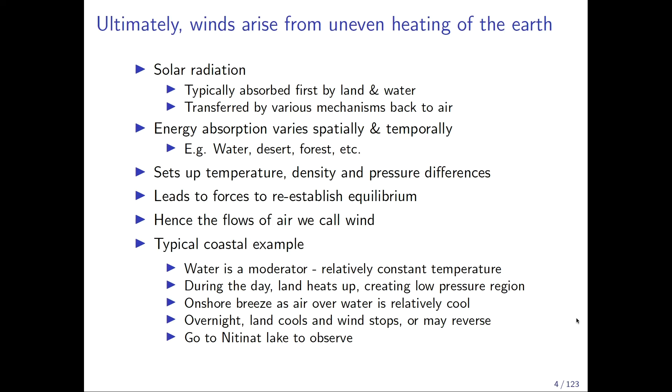So ultimately, the wind is actually a solar resource. So there's really only solar we have, which is stored as fossil fuels, or we use it directly in PV panels, or it makes winds, or you've got nuclear, basically. So what happens is you have the sun, it heats the land and the air, that creates differential pressures essentially on large scales, like we're seeing today with the new weather pattern coming in, and it's that large scale heating and pressure differences that then actually force the winds that we experience.

The absorption of that solar energy varies hugely depending whether you're offshore or onshore. There's things like if you have snow, it bounces back a lot of the light, versus a dark surface would absorb more. So there's lots of smaller scale regional impacts of that on where the wind gets developed.

So the typical one is that coastal example, and you get different directions of winds over the day. So you might have the water, which, that's why it's nice to live here, right? It stays relatively at the same temperature. During the day, the land heats up. Essentially, air is rising, you get an onshore breeze, and then you get a reverse overnight as you get the cooling.

So when we talk about individual wind turbines, ultimately what governs their operation, which is turning a rotor to make electricity, are the local winds to that rotor. So the topography is really important for that. If you're at the top of a hill, if you're in a valley, those kind of things make a big impact. And when you're laying out wind turbines, you think about that a lot.

The surface conditions, which is essentially what we sometimes call the surface roughness. So if you're out on the ocean, it's a relatively smooth, flat surface, as opposed to a forested area where you have built up trees. And that has implications for essentially how the wind speed varies with height, and we'll see a bit of that later. And then obviously urban areas, not great typically, because we have larger buildings which are really disrupting the wind resource.

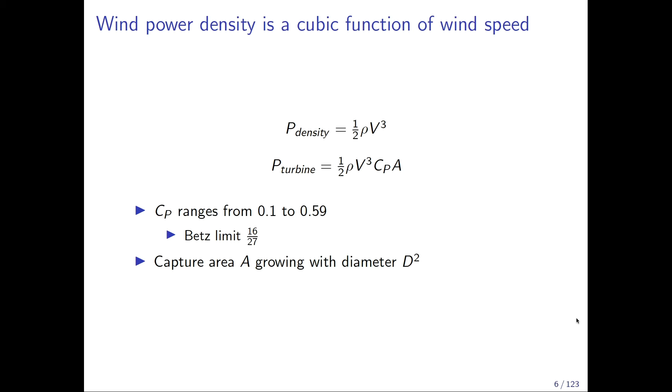So I've got one or two equations in here just because these are the super fundamental ones. So the big thing to take away from this is if you're talking about what is the energy density of the wind, so we talk about the wind speed. If you're a sailor, you'll know that in knots. We usually talk about it in meters per second when we're doing calculations, maybe miles per hour.

But fundamentally, the thing to know is that the wind speed, which we typically give the symbol V, the power available in the wind goes with the cube of the wind speed. So if you're thinking I've got 10 knots of wind, it's 10 times 10 times 10, it's 1,000 times the power in that.

Basically what that means is that if you have low wind speeds, there's really not that much power in them. You have to get up into a bit higher wind speeds because of that real big ramp up in power with the wind speed.

This is the other one. So this is basically an equation that could describe any wind energy device and its power output. And again, I'm just showing you this so you kind of get an order of magnitude sense of things. So this rho symbol, this Greek symbol here, is the air density.

And that's something around 1.2, but it will vary plus or minus, say 10%, depending on the temperature, more or less, a bit of humidity. So in the north, where the air is quite cold, it's actually quite dense, or in the winter, versus in the summer, air is less dense. So that's important. We've got that cubic relationship. And then these are the two things when we go and design the turbine that we could really control.

So this first thing, this CP, is the coefficient of power. So that's kind of like the efficiency, I guess. And it turns out that there's a fundamental kind of upper limit on that of about 0.6, this 16/27, the so-called Betz limit you might have heard of. That's the best you could ever do with an idealized machine.

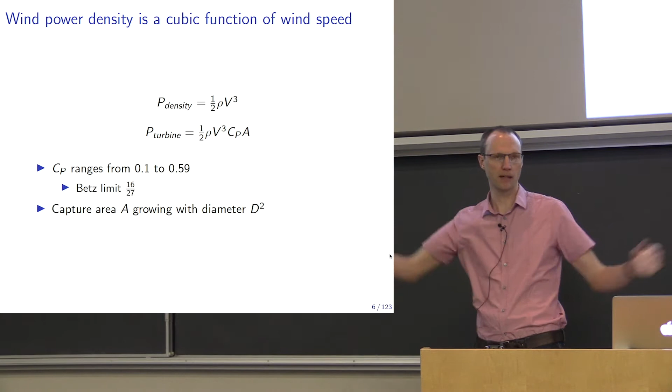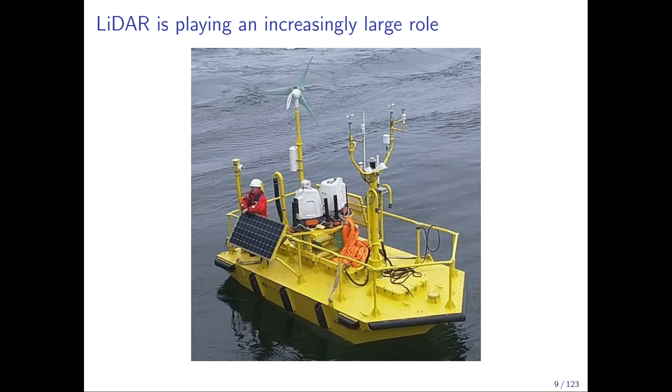This is a buoy; we're in the process of acquiring one of these from a company out in Sidney called AXYS Technologies. It's called the Wind Sentinel. So it's called a buoy, but it's like the size of a boat. And this is really on the leading edge of wind measurement technology. So these two things in here, each one of those is what we call a LiDAR.

And essentially what that does is it has a head in there that shines up a cone of light into the sky, and you can go up hundreds of meters. And the little aerosols in the air, basically the dirt or the water droplets in the air, reflect off of that light. It gets scattered back, and then there's a receptor in there that can back out from that what the wind speeds were at different heights.

So the reason we're doing this is, one, you can get more levels of information. Usually on the met mast, you might have 3 or 4 levels you could put anemometers at. This would allow you to sample 10 or 20 different layers without having to build a mast. So particularly as we think about offshore applications, it's a lot cheaper to go and anchor one of these things. It's got redundant LiDAR heads on it, and do your measurements that way as opposed to trying to put up a large tower.

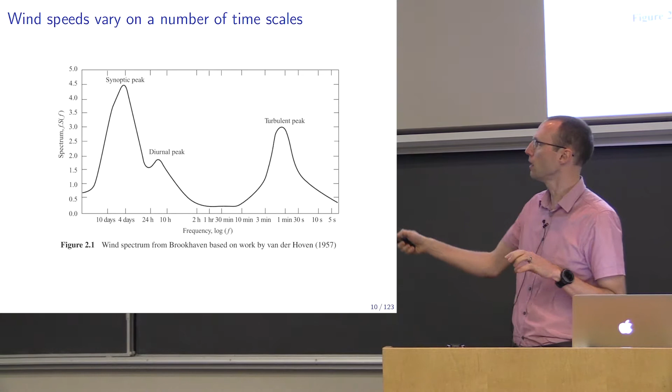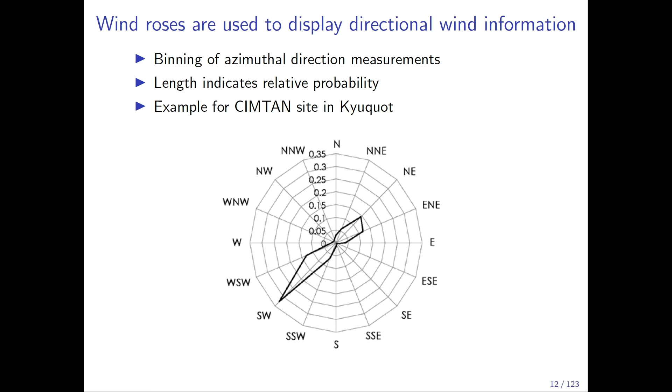So matching the shape of this curve to where we operate the turbine is really important, and this gives a snapshot to a wind farm developer of what their wind resource looks like. We also have this thing called a wind rose, and that's essentially the points of a compass, and you do your measurements for a year, you look at how frequently it is blowing in different wind directions, and you can plot it on here. So this was an example.

We were working on a site up on the northwest side of the island. So a lot of the wind comes from the northeast, and a lot of it comes from the southwest. We were in a valley, so the wind would tend to align with that valley and blow along those two predominant directions. And again, that's useful if you're doing layout of a wind farm. You can preferentially place your turbines so that they're not obstructing each other along those typical wind directions.

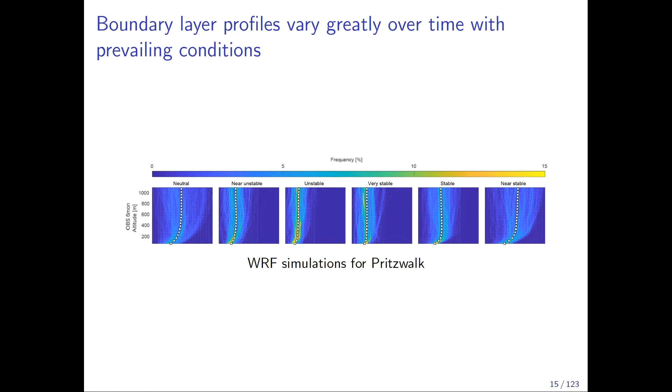So this was an example of some analysis and simulations we were doing for a site over in Germany. It's on land, it's relatively flat, but it gets winter storms and various things. And basically what I'm trying to illustrate here, so this is a plot, on this axis is the wind speed. So these are a bunch of different potential boundary layers.

So basically at the ground, the wind speed is 0, and then up higher there's a larger scale wind blowing, and in between you have to match from that 0 velocity at the ground up to what the edge of the boundary layer is moving at. So the colors correspond to different frequencies of these different shapes of the boundary layer, and each of the plots corresponds to a different atmospheric condition.

And we characterize that atmospheric condition basically by how much heating is going on. So if the sun's out and shining, it's heating the ground a lot. There's a lot of convective forcing. The air is trying to move up from the ground, and everything gets mixed together, as opposed to more stable conditions. And the net result of that is if it's really unstable, you can see this boundary layer is relatively uniform. It doesn't matter where you operate in there, the wind speed's more or less the same. Whereas if you get towards more stable or neutral, there's more of a curve.

Basically what all of that means is you want to try and move up that curve because there are higher wind speeds as you go higher up in those conditions. We were doing this in the context of airborne wind energy. As we'll see, we're flying up more in here. Conventional wind is somewhere down in these lower parts there.

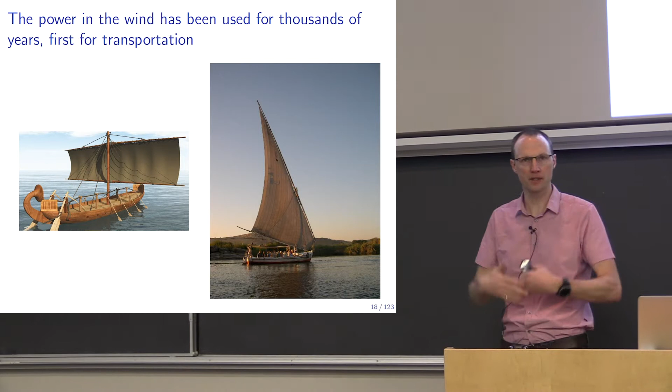So if you go way back, how did we actually use wind? We started off using it for sailing ships, right? It was a motive force, direct mechanical work to move a hull through the water. Back in about the 1st century AD, it was actually the Persians who came up with this windmill idea to grind grain, or pump water typically.

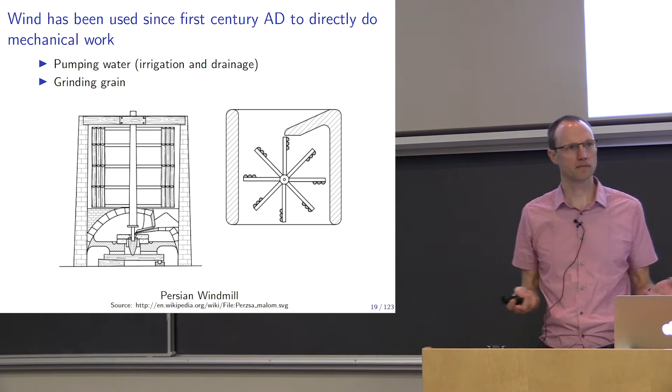So with this one, the wind would come from the top, it would be obstructed by this piece here, and then the wind would hit this rotor and spin it around, and you could hook that up to a set of grinding stones at the bottom and grind your wheat without having to haul it around by hand. So wind's actually been used for a couple thousand years in a stationary capacity like this.

Before we jump into more of that, just a little bit of terminology to be aware of. So most of the turbines you'll see are what we call HAWTs, or horizontal axis wind turbines. And all that means is that you have a rotor that spins on a rotation axis that's horizontal.

Okay, so moving on from our Persian windmills up into the 17th century, something like that, we have this Danish windmill and the Greek windmills. And again, for water pumping, grain grinding, these kind of applications. Some of these are really big. If you ever get a chance to get over there and tour, it's kind of amazing what they were able to build essentially out of wood.

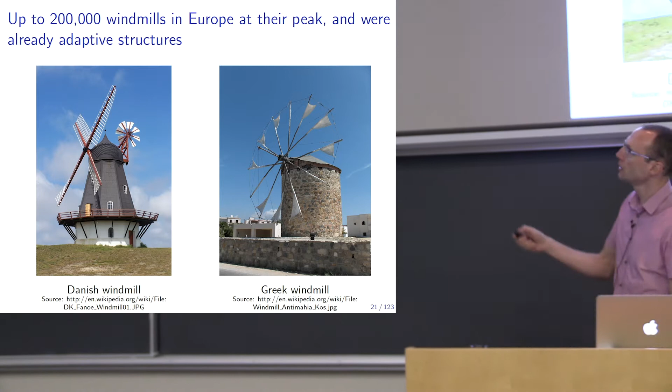And they're what we actually call an adaptive structure. So there's a lot of modern aerospace concepts where you'll design the structure to flex in certain ways. These original concepts kind of naturally did that due to those wood spars. They have sails essentially that you can unfurl and adjust the amount of power going into them. So it's actually fairly advanced stuff. And also the amazing thing is there were a couple of 100,000 windmills in Europe a couple hundred years ago, already deployed, already working.

If you've seen the US Western movies, those kind of things, this is the iconic water pumping windmill that has a lot of blades. As we'll see, you don't necessarily need that in a modern wind turbine, but the reason that these were done is that the more blades you add, the more torquey the wind rotor becomes. So with these, it has a direct shaft down pumping water out of the ground. So that's why you wanted a lot of blades on there to actually be able to drive the suction.

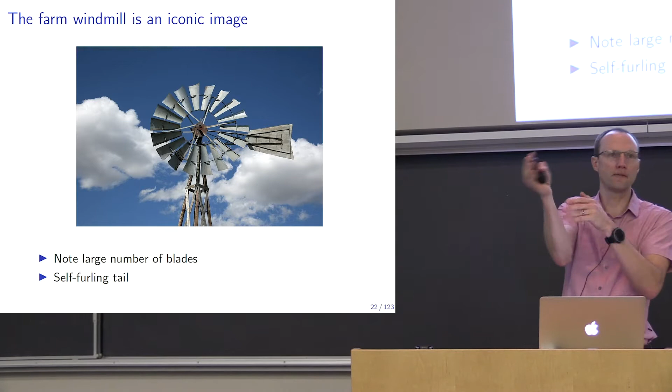It's also got a tail on it that will furl, and essentially when the wind gets too strong, that tail will flex or move and have the whole rotor turn out of the wind, and that's its way of doing power control.

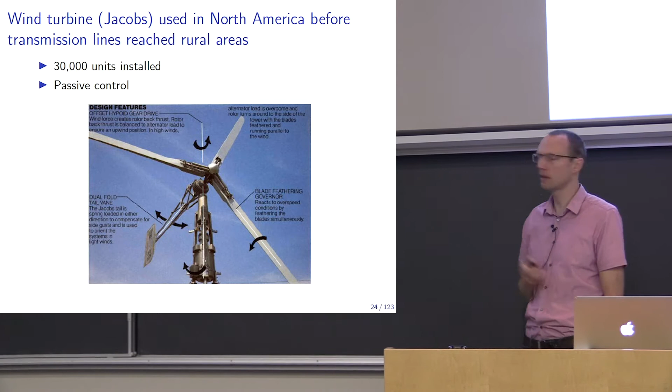There were these Jacobs turbines, back in the 30s and 40s across the plains where there wasn't electrification, there wasn't the distribution network yet. So these were popular on farms and things like that to provide power there.

And then really the modern era of wind energy started in about the 1970s, and it grew in large part out of the Danish experience. Denmark has essentially no natural resources themselves, so they were really hammered by oil prices and things like that, and invested a lot into the development of wind energy.

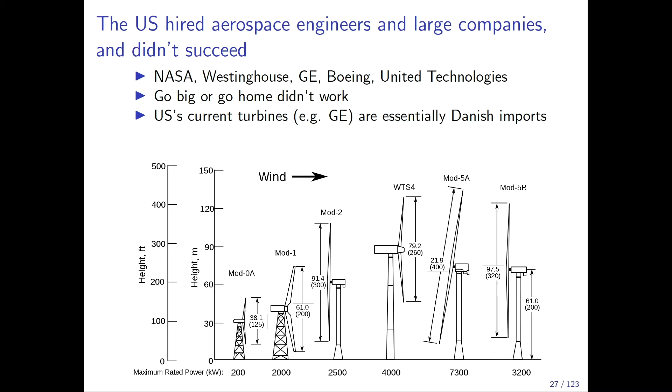They hired Boeing, NASA, etc., and took kind of an aerospace approach to things, and started with quite large machines. So these so-called mod series of machines were actually already very, very large-scale machines. They were using kind of aerospace concepts sometimes in terms of aluminum components and other things. And this is an example of one of their machines.

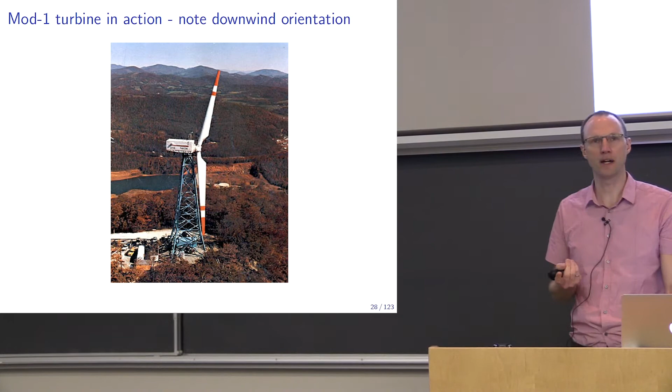This is the rotor, so the wind would be coming from the left. It's what we call a downwind rotor. They were using this truss tower because structurally that's really efficient, although you never see those anymore because they're ugly and people hate them, and birds nest on them. So for a bunch of reasons you wouldn't want to do it. But unfortunately, the US effort was essentially an unmitigated failure and kind of died off.

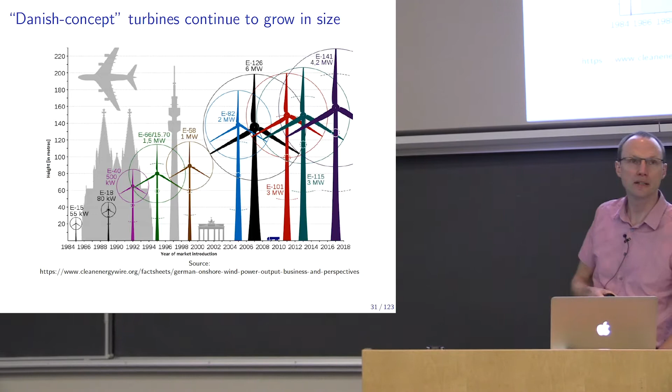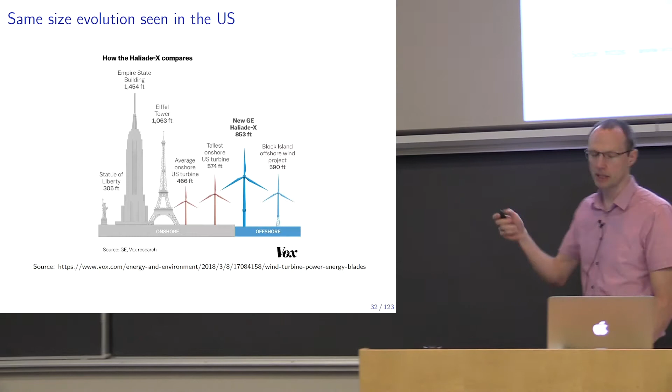But the most recent one that they're just testing now, just started last fall, is this Haliade-X machine. So you can see 860 feet to the top of that one. Quite huge. It's different because when you go offshore, as we'll see, you can go a lot bigger. So that's kind of what's driving that development.

If you go and order up a wind turbine, so you dial up Vestas, go to their website, you get their brochure because you want to buy a wind turbine. Usually what you'll find is a catalog of a nominally rated machine, but it'll come in a bunch of different versions, kind of like different versions of a car or an aircraft when you order it.

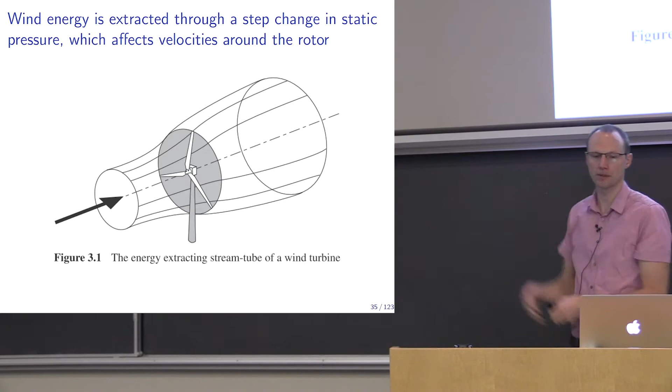This is another illustration. So we have our rotor here, and you notice that these simplified models don't say anything about the shape of the blades. This is where we get that fundamental limit to the power capture from: we have what we call an actuator disk. So that's just a region in space that's taking pressure out of the flow.

And then again, we start up here, we have our wind blowing in, it approaches the rotor, the pressure rises, it hits the rotor, that's causing that pressure drop, and then somewhere back here in the wake, the wind is mixing back in, we go back to atmospheric pressure, and we have a reduced wake velocity. And then far downstream, everything mixes totally together, and you have the free stream wind speed again. Okay. So that's fundamentally what's going on.

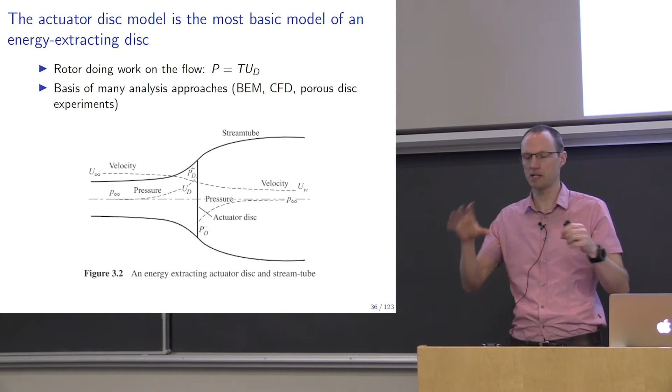That's the basis of some of our analysis codes. And it turns out you can actually do experiments like this. So you can go into the wind tunnel, you can take just some wire mesh, which causes a pressure drop, and you can use that to simulate a wind turbine, especially if you're trying to simulate a big array of wind turbines. That's one way of doing it.

And essentially that's what we do to analyze the rotors. We break it down into a bunch of sections and we look at what is the flow as the rotor is spinning around, what's the flow coming into that airfoil, what forces get generated, and that tells us what the power output is, is the blade going to break, etc.

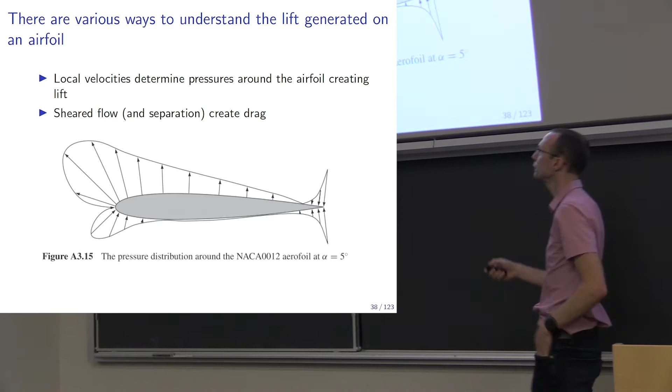So that's our little picture of the airfoil. And again, fundamentally what's happening here is we've got wind coming in like this, hitting the airfoil at what we call an angle of attack, so it's not just straight onto it. And then because of how the wind flows around the airfoil, we generate different pressures around the airfoil. So that's what these lines are supposed to indicate, our pressures on it.

So this is what we call the suction surface on the top; there's actually negative pressure there, so it's sucking it up, and then there's some positive pressure here. We add up the pressure all the way around the surface, and that's what gives us a net lift and a net drag coming out of it.

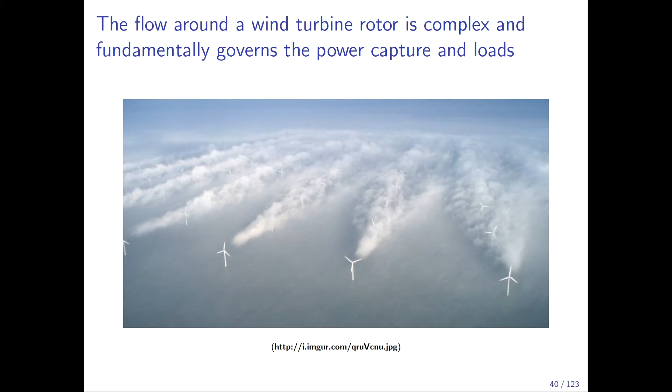So the lift is the good thing, that's the thing driving the rotor around. The drag is kind of the bad thing that's slowing our rotor. So we're always trying to maximize the lift to drag ratio of the airfoils, and there's lots of work that goes into designing the shape of those airfoils to make them most efficient. So aero is complicated.

So this is a picture of the Horns Rev offshore wind farm, one of the early ones, the earliest one I believe, that was put in. And this is kind of a nice flow visualization: you have some relatively moist, humid air, so with those pressure changes you actually precipitate out some of the moisture and you can see it as clouds. So this is just showing essentially the wakes and how they're all mixing together.

This is an example of where the wind is coming along the line of where you install your turbines. If you look really closely, there's turbines that are installed in like a grid. So this is kind of a bad situation in that the upstream turbines get nice clean air, but the ones further into the array are getting all the turbulent, lower speed air. So you try and avoid that as the standard wind direction. You wouldn't want to line it up in that direction.

There's also some research and some controls where you might not operate these machines at their peak efficiency. You kind of back them off a bit, but it means that the wake is less, and hence your machines further into the farm can actually generate more power. So as a whole, and you might have a couple of hundred turbines in your array, it's going to give you more power output.

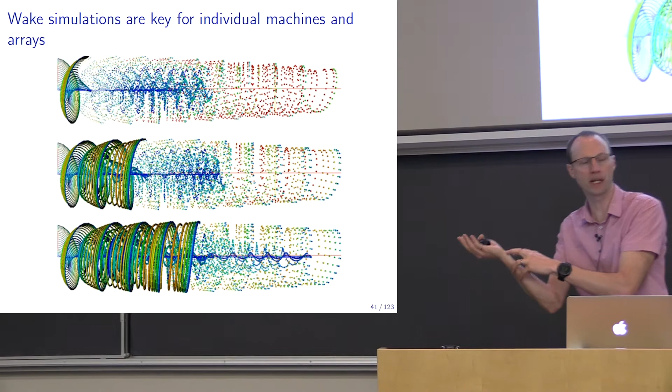This is some simulations that we've done in my lab. Essentially what this is showing again is the wake of the turbine. Idealized, it kind of looks like a helix. So these are some filaments and particles with which we can simulate what that wake structure is. And the reason we spend time on that is that the shape of that wake structure influences what the velocities are right at the blade. And it's those velocities that govern how much power we can produce. So that's why we look at that.

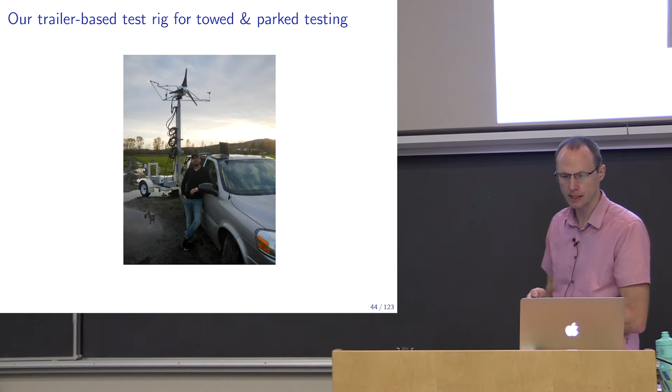That's a real challenge. So one thing we were doing in my lab was using, again, a small rotor here, about a 1.5 meter diameter rotor. What we did was we mounted it on a trailer on a tower, and we can drive this down the road and get that relatively uniform wind speed, but the idea was that we could also go and erect a mast and put it in a turbulent environment and actually just measure the real turbulence. So on the back here, it's a little bit hard to see, we have one of those sonic anemometers, so we can measure the high frequency variations of the wind speed and give us some experimental data to compare our codes against.

So how do we make turbines better? Aerodynamics is key. It's the same as aircraft. If you can get a little bit of aerodynamic performance improvement over the 20-year life of the turbine, you're going to get a lot more money out of it. It turns out near the root, so in the base part of the blade, just how the aerodynamics works out is the airfoils will try and stall. Basically that means the air can't navigate around it. It tends to break off the backside of the airfoil, and that causes a lot of drag.

So a lot of the times you'll see various different shapes. They can be little foils stuck up on the surface, but essentially what that's trying to do is energize the flow over the airfoil and have it stay attached, which gives a little bit more drag, but overall it's better to avoid stall. You can do things at the trailing edge, so these serrated trailing edges, like a sawtooth pattern you can add to the back of the blade. That can help with noise sometimes, how the air leaves the trailing edge of the airfoil.

There's a Canadian company that took some inspiration from humpback whales that have these tubercles on the front of them. So you can make the front of the airfoil with this wavy pattern in it. There's some evidence that can help, again, avoid some separation, maybe give you some benefits as well. So people try lots of different things. People put plasma actuators on there, all this kind of stuff. Think of an aircraft wing. It's got lots of control surfaces on there, ailerons and things.

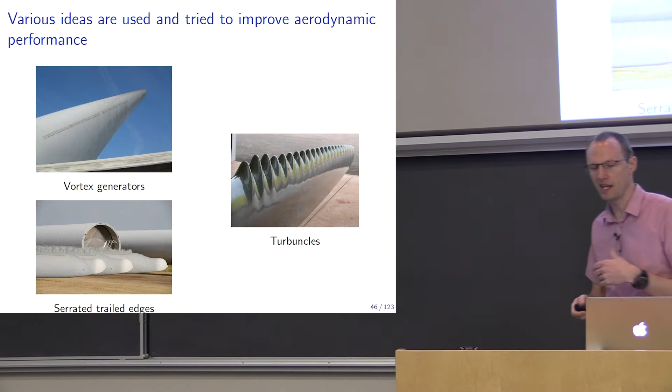Wind turbine engineering is a lot different than aerospace in that you're a lot more cost conscious, and your maintenance intervals are more like 6 months to a year. An aircraft gets serviced as soon as you land, every 5 to 10 hours, right? Whereas a wind turbine has to work reliably by itself for long periods of time. So complexity is typically bad. People have tried putting ailerons and other things on blades, but practically speaking, it's not going to have the reliability that you need. So it's really challenging.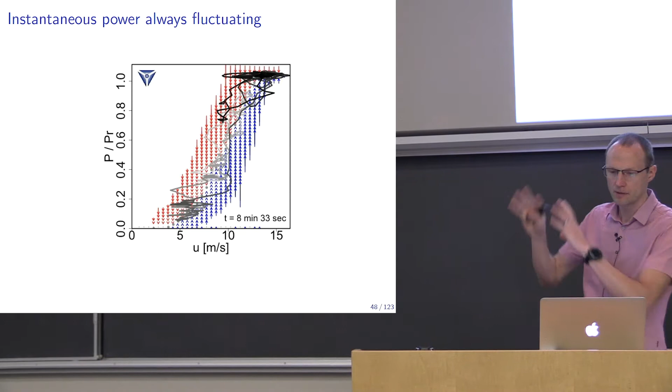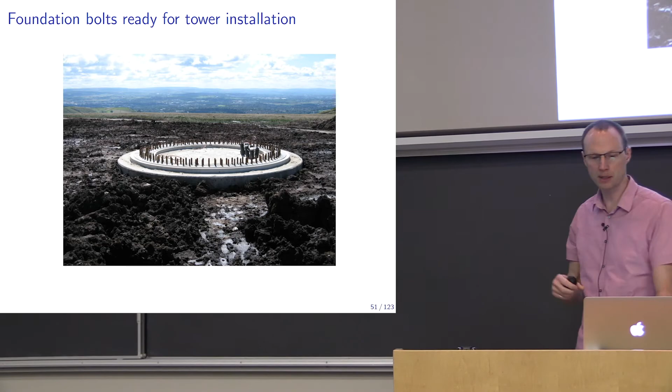So we have to actually build a turbine. Just to give you a little overview of what goes into that, we've got the foundation, which is a whole bunch of rebar, steel basically, that then gets covered in concrete. And you end up with this thing on the surface. There's a bunch of bolts sticking up, and that's what we then bolt the tower onto. As I said, pretty much every tower now is a tubular steel tower. Sometimes some sections are made out of concrete, but it still looks the same from the outside.

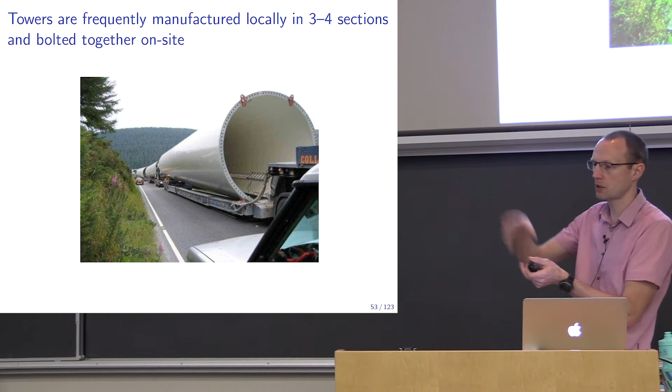Historically, if you're a structural engineer, these lattice towers are beautiful because they're really efficient in their use of material, but they're ugly, so you're never going to build one of those. The tubular towers are very, very big; you try and make them as local as you can, but they could be 8 meters in diameter. Lots of bolts you go in and torque up. Usually they're made in 3, 4, 5 sections, and then a large crane comes and picks them and installs them.

Once you get to the top of the tower, you can literally climb up inside these things and walk around. You have the hub out here. That's usually a big steel casting. And then you have bearings that allow the blades to pitch and some actuators so you can turn the blades around. You have a bunch of big bearings that support that. In here, on a conventional turbine, there'll be a gearbox, just like in your car, usually 2 or 3 stages of gearing. And then that goes into a generator at the back.

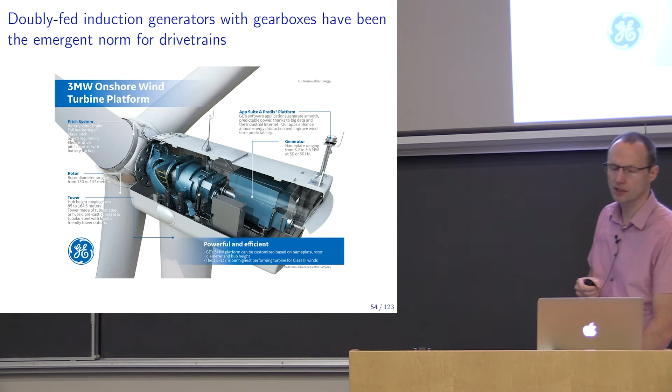That generator takes the mechanical shaft work from the wind spinning the shaft and turns it into electricity. The reason we have a gearbox is because these large rotors might spin at, say, 10 or 15 RPM. Generators like to turn at thousands of RPM, so we put a gearbox in the middle to match the speeds. You'll always see a little anemometer stuck on the top, but that's not actually used for second by second control, because the rotor is really influencing the wind speed by the nacelle. Okay.

Because of the way they do it, these tend to be very, very heavy at the top, but they're kind of rugged in the sense there's no gearbox to break. In the early days, there were lots of problems with gearboxes breaking, and there still are, so we try and avoid it. So this company's been doing that for decades. More recently, other companies, as machines have gotten larger, and particularly going offshore, are doing the same thing.

So Siemens, which bought out Bonus, is now merged with a Spanish company called Gamesa, so they're one company. They also have a direct drive machine you can buy. It's got a hub and a generator, but you notice this is more compact. The reason you can do that is using permanent magnets inside, as opposed to making the magnetic fields with electricity. So it's been able to shrink things down and make it more compact and a bit lighter. It costs a bit more, but on balance, it kind of works out.

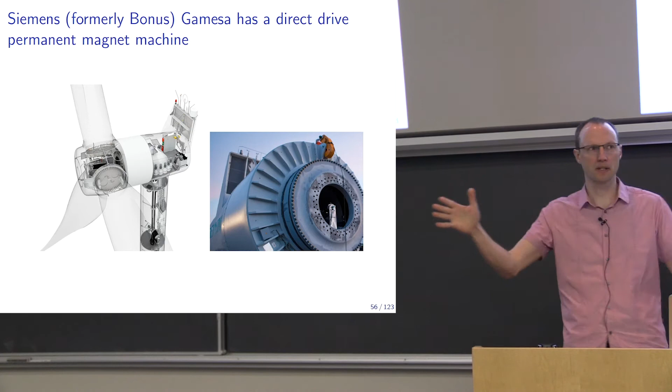You'll also notice down here, these cylinder things, that's a bunch of what we call yaw drives. The turbines also have to turn and face the wind. So there's basically a big gear and bearing in here that allows the turbine to turn and face the wind.

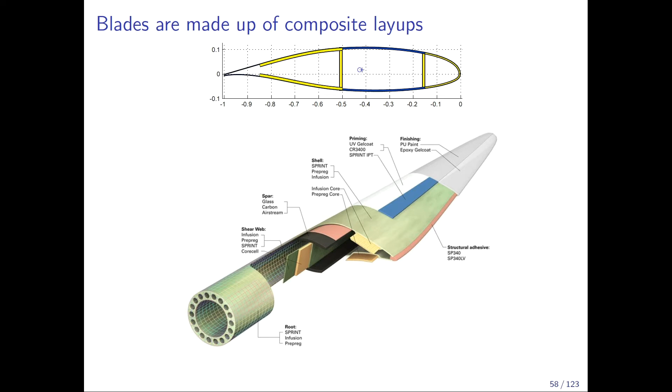For the structure inside, at the root you bond in some metal threaded inserts, so you can actually bolt it onto the hub, and then the rest of it is basically layers. You'll have a gel coat or a paint coat on the outside, and then structural reinforcement. So there's carbon fiber and glass fibers running the length of the blade to take the big bending loads. You'll also have what we call shear webs, these vertical pieces that help give it some of the stiffness and structure as well. I'll skip that for now.

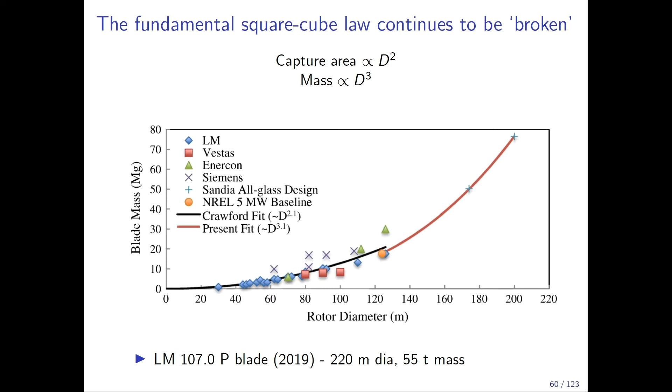This was a plot from way back in my PhD in the mid-2000s. I took a bunch of data and plotted how the weight of the blade varies with the rotor diameter. There's this fundamental square cube law that people talk about. We want to make the rotor bigger to capture more energy. That goes with the square of the diameter, but volume goes with the cube of the diameter. So you're always fighting this battle. I make it bigger, but it's getting heavier faster than I'm making it bigger.

These are some projections from years ago of where things would end up when we get to a 200-meter rotor diameter. We thought it might be like an 80 metric ton blade. The one that was just made at the end of last year is 220-meter diameter and only 55 tons. What that means is the structural concepts have gotten better, which allowed these bigger blades to happen. Otherwise, you wouldn't make it bigger. When I was doing my PhD, a 1 or 2 megawatt turbine was amazing. We're now into 10 plus megawatt turbines.

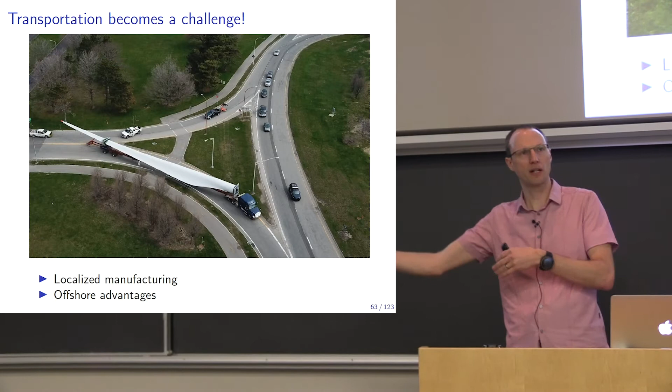The size of the blades becomes problematic for transport. This is probably maybe even a 30 or 40 meter blade, and imagine trying to transport that around. So that's what's limited onshore. You can only make blades of a certain size and still be able to transport them. Whereas offshore, you can put your production plant right next to the pier, stick it on a boat, take it out, and the size is not a problem.

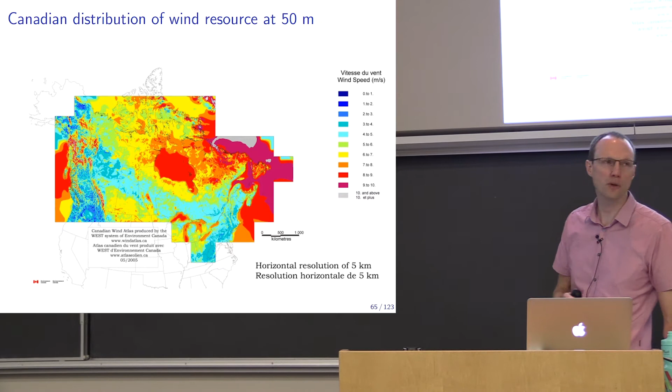So in terms of wind resources, this is a map of Canada, and basically the reds and yellows, that's higher wind speeds. And the point was that it can be localized, so you've got some things in the Rockies and foothills where it's not so great. You've got down here into the prairies, into Alberta, where you get some local wind speeds. But the big thing is you'll notice all this red and pink and purple stuff as soon as you go onto either the Great Lakes or out into the ocean. So there's lots and lots of wind resource at sea, and that's going to motivate us to go offshore.

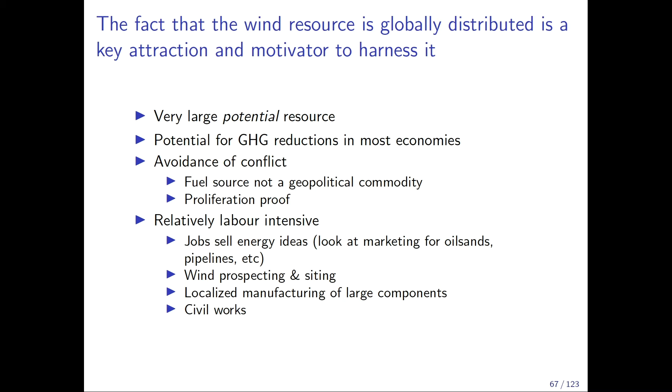So the reason I got into wind originally was because it's a globally distributed wind resource. It's typically a benign kind of thing. In terms of selling wind energy, it can be a good story when we think about jobs, because a lot of it is local just by the scale. So it's all kind of good from that perspective.

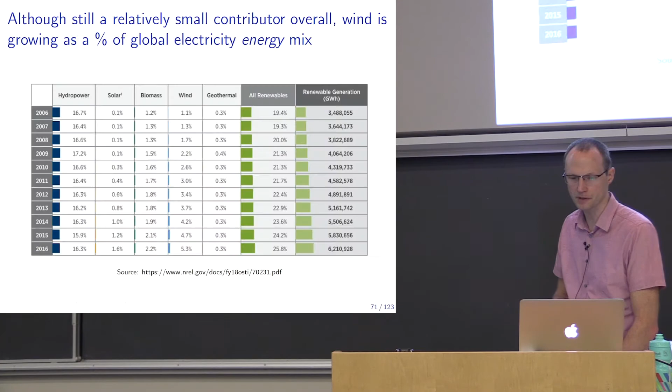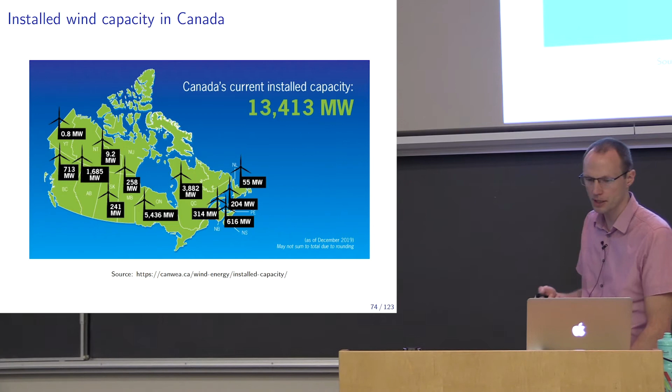Let's skip that. This is what we have in Canada right now. We have about 13 gigawatts of installed capacity. You can see the breakdown. We have a bit here in British Columbia, and then there's really a ton in Ontario and Quebec, and also quite a bit in Alberta. And that's really where it's been developed because of resource. In Quebec and Ontario, some policy things have driven it as well. Skip all of that.

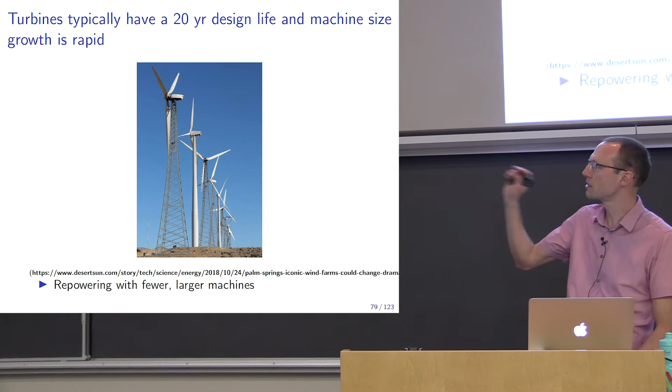Skip that too. I wanted to get to this part, some of the downside. We are now reaching the end of life of some turbines, and you've got to do something with them. These are the old original ones from the 80s down in California. Again, these kind of ugly towers, a mix of different machines. So decommissioning is happening currently, and things that we call repowering, where you're replacing a bunch of smaller turbines with singular larger turbines. The waste issue is also becoming an issue.

Vestas, that company I alluded to, they've committed to being waste neutral over the next while. So it's definitely on the radar, and it's something the industry is looking at. Let's skip that too, actually.

Actually, I don't know, do we want to take a little break and then? Yeah. Let me do that. We'll start with this. Good. So take 5 minutes? Yeah, 5 minutes. Yeah, good.

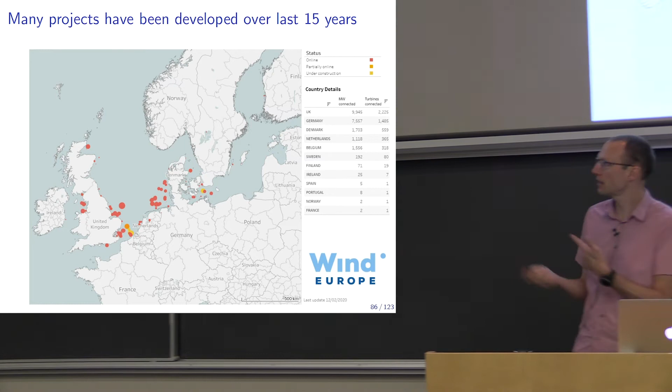When you go offshore, you still have to deal with environmental issues. But typically, especially if you're more offshore, there's less of the local community impact piece of it. Some of these have actually turned into tourist attractions too, where you can pay to take a boat out to see the wind farm. So this is one called the London Array. This is 175 turbines. This was done back in 2013, so 7 years ago is when it came online. It's a total of 630 megawatts. So again, for scale, Site C is 1,100 megawatts rated. So this is about 2/3 of Site C put in out in the Thames estuary.

It's a bit older, so these are 3.6 megawatt turbines, 120 meter diameter rotors. But that's what it looks like as you fly over it. If you ever take off out of Heathrow and you're headed east, do look down. You can literally see it out there. It's kind of cool. Again, as an engineer, I think this stuff looks cool. Some people don't, but that's basically out to sea, so you don't really see these things. It'd be like a little speck on the edge.

There was originally going to be another phase. They were trying to build a whole gigawatt of capacity out there. It got abandoned. I forget the name of the bird, but it was just too hard to fit it in with a migratory bird. So again, in terms of impacts of these things, that is considered, both the installation, if you're putting things in the water, what the local marine life is doing, and particularly migratory birds is an issue.

In the UK, there's actually been some work on stealth blades for wind turbines, basically because there's worry that a low-flying aircraft could use the radar scatter of a wind farm to do a sneak attack, that kind of thing. So siting does go with military considerations as well when you're going offshore. So basically the style of foundation that you do offshore is dependent on what the water depth is and what the local geology is.

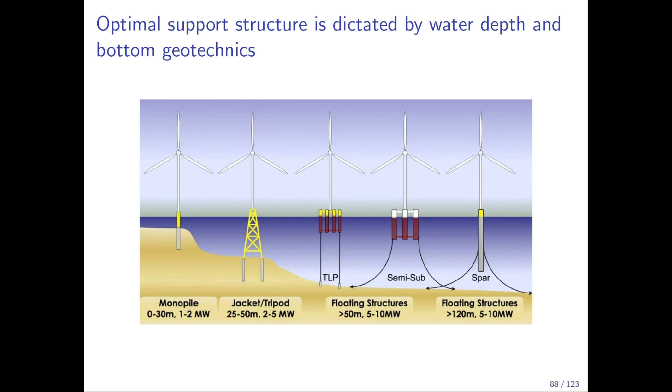So if you're in up to about 30 meters of water, you typically find these monopile things, which are basically just driven into the seabed, and then you bring along your tower and install it. A bit deeper water, these jacket tripod things, basically again you'll drive things into the seabed and then mount a truss structure on top of it and then the turbine on top. We'll come back again to these concepts, but these are what we call floating offshore wind concepts. They're kind of the next generation; there's just been the first array or two of these put in.

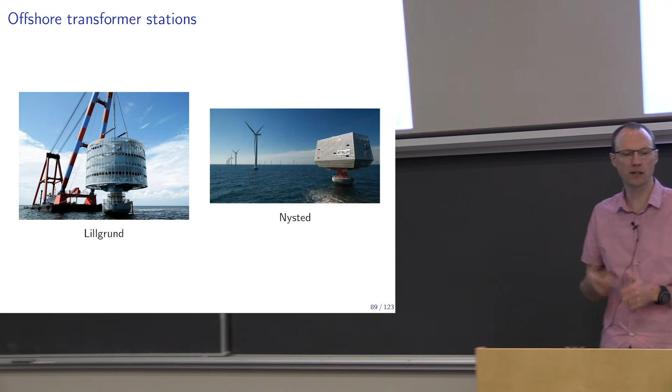The part that you never usually see in a picture of an offshore wind farm, you usually just see this part, are these boxes of some kind, and those are the local substations. So you have feeder lines from all the turbines being brought together. You'll have a transformer in there to take it to a higher voltage, or sometimes DC instead of AC for transmission back to shore. And the layout and sizing and those underwater cables are pretty expensive, so you try and do that as efficiently as possible.

There's been a whole specialist industry spawned by offshore wind. It used to just be you'd have to rent these giant oversized cranes that are usually for lifting ships and things like that. But there's a number of what we call jack-up vessels or jack-up barges now available that you can rent if you're building your wind farm. Essentially, in relatively shallow waters, you can put these legs down into the water and jack the whole thing out of the water. So now if it's windy or wavy, it doesn't matter. You've got cranes on board that do the picking and placement of all the tower pieces and then the nacelle.

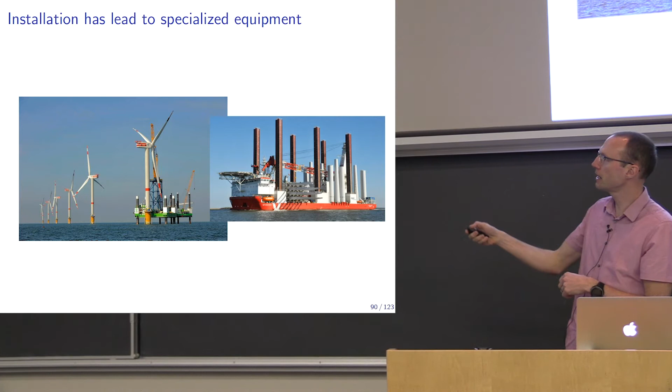You'll see on board here, it'll go out with a number of different turbines on board, 4 or 5 turbines, blades stacked up in there. Sometimes they'll do this bunny ear configuration where they have 2 blades already attached to the nacelle, so they can lift that up in one lift operation and then just have to put a third turbine blade in at sea. And again, lots of process optimization to get that efficient and running well. And the cranes, it's not really a weight limitation, it's more just a height and size thing, so that's why you end up with specialist equipment.

Similarly for servicing, these turbines are visited typically every 3 to 6 months, something like that. So there's some specialized vessels to do the crew transfers, drop them off to do their work for the day. I don't think it's as common anymore, but there are also sometimes small pads on the top where you can helicopter and get winched down onto the nacelle. And you'll typically see these yellow things. That's the part in the wash zone that gets splashed, and then the top part is more similar to a conventional onshore wind turbine.

The first one, Horns Rev 1, there were definitely growing pains through the 2000s. They basically took an onshore machine and put it offshore. We learned that salt water is not good with electricity and things. Surprise. So there's actually positive pressure inside these now. They'll have filtered air that gets sucked in, you pressurize inside, so any leaks essentially are going out, so you keep the humid salty air outside, things like that. And again, ruggedization and reliability is the name of the game here.

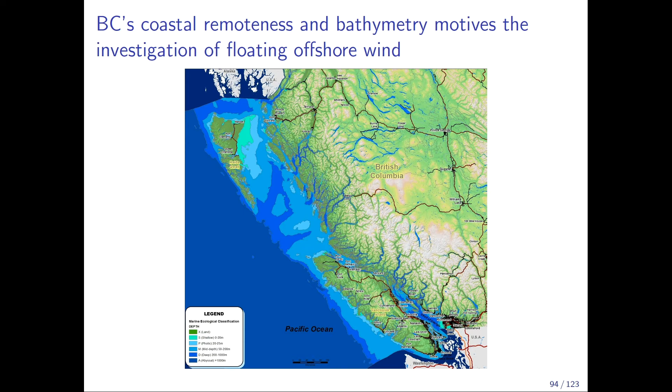So in terms of resources, we saw this, in Canada and in the US there's a lot of offshore resource, in particular in BC. If you look in here, this is Haida Gwaii up here. This is what people talk about as our big resource. NaiKun was a company looking at it, but there's something like a gigawatt or 2 of wind energy in relatively shallow water available up there. And that's important. So this is the bathymetry: darker blue is super deep, lighter blue is better. You can see where that wind resource is, there's also some relatively shallow water, which is why it was interesting. It's unfortunately not next to where most of us live and take electricity, so the transmission line piece of it you'd have to work out.

But this is what's motivated some of this floating offshore work, in particular in North America and some in Asia as well, because we have relatively deep water compared to the North Sea and the European experience. So down off of Oregon, California, and then we also have opportunities out here. Again, there's lots of wind resource out here. If we could make things that worked in deeper water, there is wind resource there for us to capture.

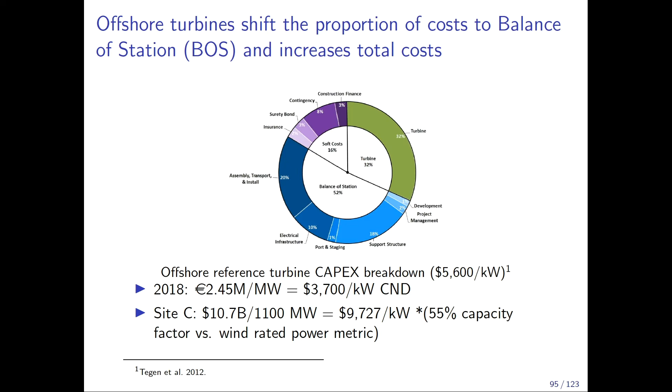It's a little bit into costing stuff, and really the takeaway I just wanted to point out here was that here's a pie chart of all the costs that would go into an offshore turbine. And actually the turbine itself is only about 30% of the cost. For an onshore turbine, that might be more like 40 to 50% of the cost. But as you go offshore, all the other stuff, so the support structure, assembling it, transporting it, installing it, this slice of the pie gets bigger.

In terms of cost breakdowns, it's really hard to get accurate cost numbers because what people actually sell machines for is extremely commercially sensitive. But as rough estimates, in 2018 at least, we had something on the order of $3,700 Canadian per kilowatt installed. So if you're going to make a megawatt machine, it would be like $3.7 million to get it put in. As a comparator, here's Site C. Current numbers, this has probably changed again, but something in the order of 10,000 a kilowatt.

Now, you can't exactly compare them apples for apples because we have this thing called capacity factor, and that's basically how much of the time you run at your full capacity, that kilowatt capacity, versus how much energy you actually make. So Site C is going to have something on the order of a 55% capacity factor. Onshore wind traditionally has had something like 20 to 30, 35% capacity factor. That's shifting offshore. Demonstrated capacity factor has been up to 65%, or sometimes even up to 70. So that's a much better utilization of your kilowatts of generation capacity.

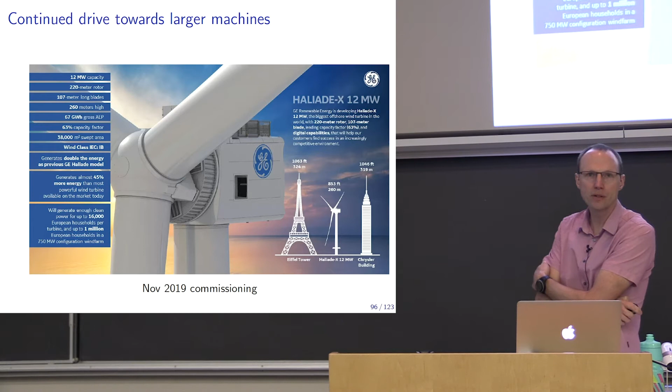This one has just been commissioned in November. You basically go through a certification process. It takes a year or so, and then it'll be commercially stamped, and you can go and buy it as a product. And this is the kind of scale when you're planning a wind farm out over the next 2 to 5 years. That's the kind of scale of machine that you're thinking of installing.

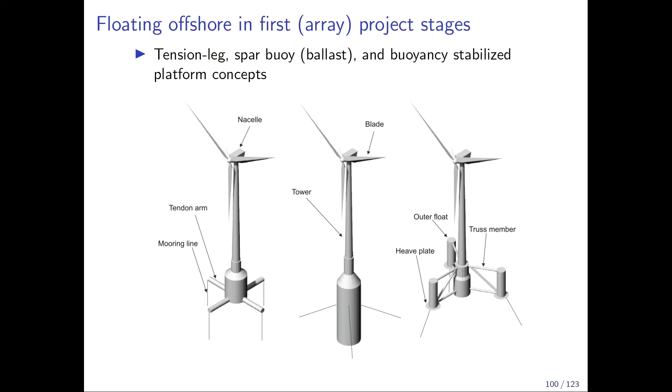So these are the 3 basic ways you could do floating offshore. We've all got a turbine on the top here. There's this thing called a TLP, a tension leg platform, and you make a big buoyant buoy, you put some tendons out from it, and then you essentially put suction anchors into the seabed and you suck it down into the sea. So all of these things are under tension, and that's what gives you the stability of the thing.

This so-called spar buoy comes out of oil and gas technology, where it's basically like a sailboat keel. So this is a long, maybe like 100-meter long tube. It's buoyant, and it's got mass in the bottom of it, so it's like a sailboat. When it tries to tip, the mass kind of keeps it there. And you've got more slack catenary moorings just keeping it in place so it doesn't drift around too much.

And this last one is called buoyancy stabilized. Essentially you have flotation, usually some kind of tubes spaced out at a distance, and it's like a big barge. If you try and tip that, because the buoyancy is out far enough, it'll tend to right you back. So those are the 3 basic ways. Floating offshore has been looked at for something like the last decade or so.

So these are some examples of the first one. Hywind was made by Statoil, the Norwegian company. They put this in back in 2009 with, again, a large turbine at that point, 2.3 megawatt. This Hywind project operated successfully. There's amazing 8-10 meter seas going past this. You can imagine the forces and motions going on there, but it was essentially a success. The oil and gas majors are interested in this space because this is like a baby oil platform for them, basically.

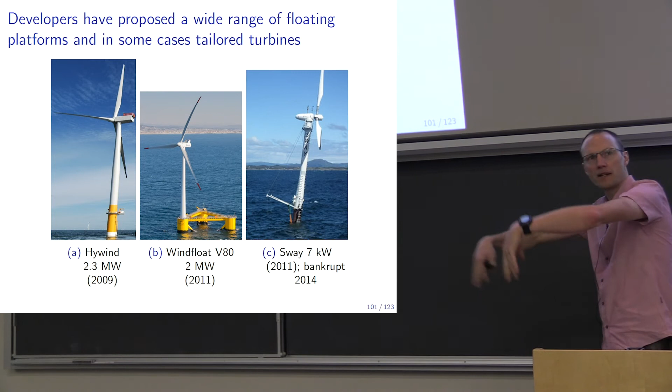So this is, again, one of these downwind rotors. It's nice when you go downwind because the blades can be more flexible. It doesn't matter if they flex away, they're not going to hit anything, whereas upwind, the blades, if they flex back, will actually smack the tower. So modern, really big blades are actually molded to have, they call them banana blades.

So they're molded to kind of be bent upwind, and then as the wind pushes on it, they go straight, so you avoid hitting the tower. So I thought this was cool because the tower itself then also uses these stays, so again, it's more structurally efficient, but they kind of ran out of money and didn't make a go of it, unfortunately.

So more recent developments, again, Statoil, Equinor, they rebranded themselves as Equinor, had this Hywind Scotland project that went in a couple of years ago. It was 5 machines. You see they've tripled the size of the machines, so these are 6 megawatt machines, and this was the very first floating offshore wind turbine array. So it's a 30 megawatt.

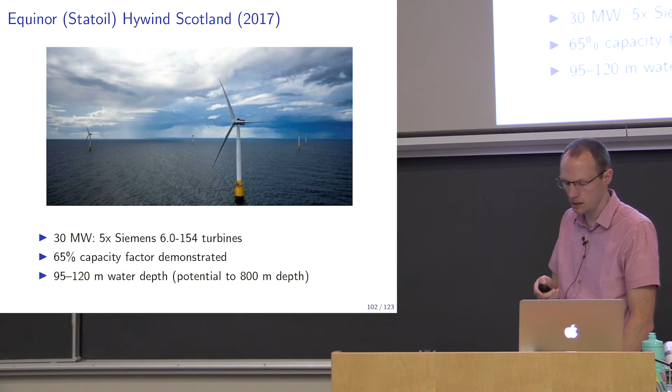This was the one that has demonstrated the 65% capacity factor. So it means that you're getting 30 megawatts of output 65% of the time, kind of averaged out. So very, very good utilization of that infrastructure. This was operating in about 100 meters of water, something like that. So once you go beyond 50 meters, it's hard to do those bottom-mounted ones. Potentially, you could put this concept in, Statoil or Equinor talks about like 800 meters of water, something like that. This is one they're looking at.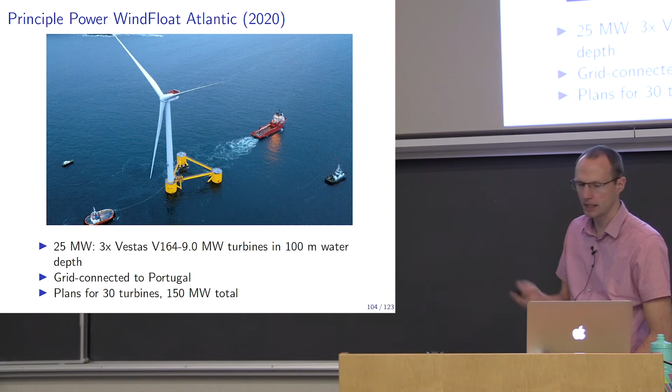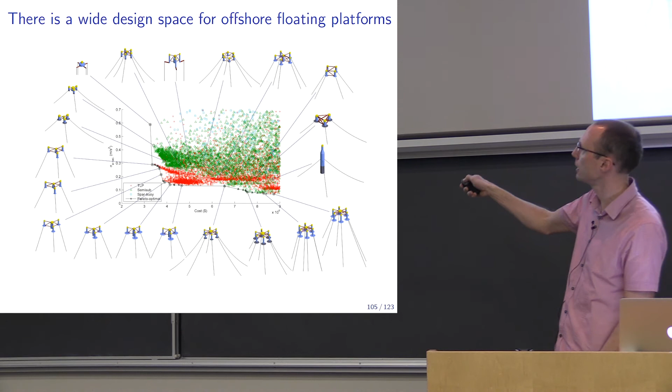And some of them look like that spar buoy, like the Equinor design. Some of them are like the Principle Power design with various numbers of floats. There's these little plate things on the bottom, these damper plates that dampen the motion. And basically this allowed us to look at the so-called Pareto front along here. So this is kind of the best you can do of all these designs as you spend more money. So basically as you spend more money, the tower moves less. So you can kind of do a trade-off study of how much movement is allowable, basically. And we've extended that to other metrics of performance as well.

Touching on VAWTs again for a sec, this is where VAWTs might reemerge, although I think that no one's really done it. Basically, they got abandoned at about the 500 kilowatt size. But people have now proposed that once we get beyond 10 megawatts machine size, we might go back to a VAWT design. And basically the idea is you've got this over 100 meter blade. It weighs 50 or 60 tons. So every time it goes around, it's trying to bend it one way, and then it comes around, it's trying to bend it the other way.

And that gives a lot of what we call fatigue damage, just from the fact that it's rotating around, not even counting the wind. So some of these concepts for vertical axis turbines are kind of being proposed because imagine how this thing, well, either these spin, there isn't that big gravity cyclic bending moment coming into the blade. So maybe it's advantageous, depending on how you look at it, not having the generator a couple of 100 meters up as this giant mass moving around could be a good thing, because these ones typically the generator's lower down, although you've got to seal it well so it doesn't get splashed on.

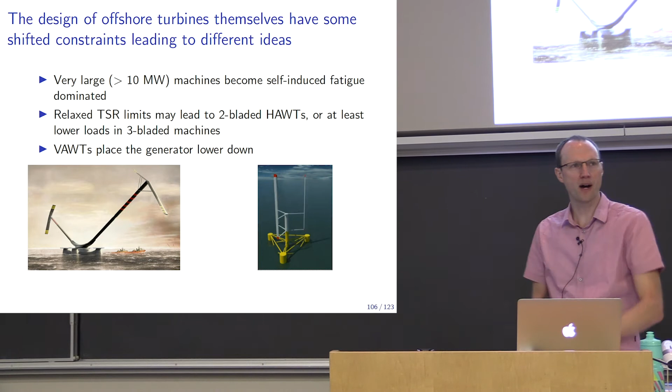But so maybe something will come of this. I'm not convinced, just because you'd have to compete in the market. You'd have to be, from day one, building a 10 megawatt machine, which is really, really hard. So we'll see. So this last one, idea of airborne wind energy.

So the premise here is you're getting bigger and bigger turbines, right? So over time, we're up into the couple of 100 meter height. So this is height and just showing sizes of devices. The idea with airborne wind energy is you actually fly something, you could call it a kite, and you fly it even higher, so your wind resource is even a bit better. But you're actually only occupying, and you're moving fairly fast, kind of in this annulus out here. So this is a tether, and you're flying around and capturing power that way.

So the promise of airborne wind energy is that you avoid building a tower. The inner parts of the blades don't actually really make you much power. They're just kind of there to support about the outer 30% of the blade where a lot of your power is getting built. So that's the idea, the reason people look at airborne wind energy. Originally, like 10 years ago, when people first started looking at this, they thought, well, we'll just fly this up to 20,000, 30,000 feet and actually capture jet stream level energy, which is going at hundreds of kilometers an hour. Quickly they realized that's completely infeasible because there's no way you're going to have tethers extending to that height. But people talked about that just because of the resource there.

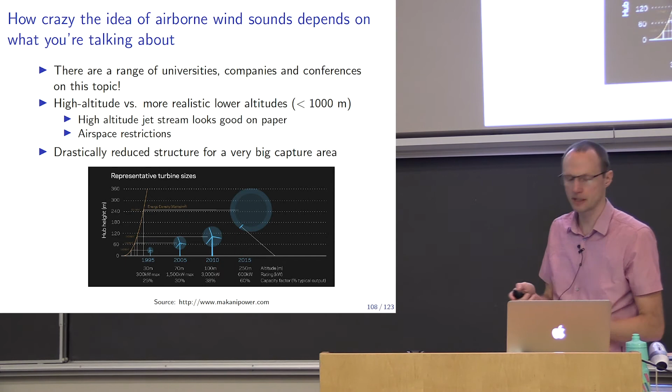So we're more talking up to kind of 300, 400, maybe 500 meter height, which is still taller than even the biggest conventional turbines. And the idea is you've got a lot less material you have to put in there. So there's a bunch of different concepts, again, that people have looked at. This was a company out of Ottawa that was basically like a blimp, and it would spin around, so it's kind of like a horizontal axis, or a crossflow type design. This was another one out of some MIT guys, basically make a blimp, it's like a duct, and then stick a conventional turbine in there.

Neither of these are moving around the sky, which is good from a regulatory piece, bad because you want to move around the sky to capture more energy. So the last I heard, these were basically being proposed as something like a radio tower kind of thing, or a cell phone repeater, something like that. This is more what I'm talking about for airborne wind energy. Pretty much everyone starting out in this was into windsurfing or kiteboarding, so they literally started out with kiteboards. This was an evolution of Makani, so it was a 10 kilowatt device, and most people have gone to something more like an aircraft design. They've got some propellers on here, things like that. So again, lots of different concepts there.

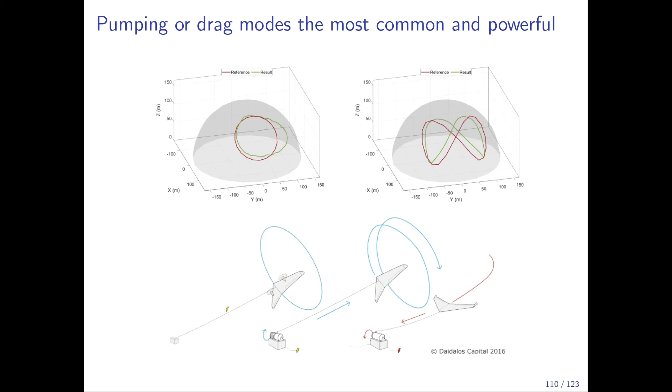But fundamentally, there's two ways of doing this. This showed up too light, but over on the left here, you have a set of propellers on your kite, and then you just have a fixed length tether. And the idea is that it moves around and the wing is forcing it through the air, and then the propellers on there turn into generators. You make some electricity, and then you somehow figure out how to make a conductive tether to bring the electricity down to the ground. Okay? Easy. And then the other main way to do this is the so-called pumping mode, which is, I think, probably more feasible, what we'll see. And basically the idea there is you put your generator and a spool for your tether on the ground, and now your kite is essentially just pulling that out, and it flies some kind of helix or figure of eight.

This is what these paths that we've been playing around with. You fly a figure of eight or a circle, and it helixes downstream. So it pulls it out for a certain period. That generates electricity. And then the plane essentially goes into a dive to come back upwind. You reel in the tether, and then you do it again. So it's pumping mode because it is cyclic.

But the advantage is you don't need to fly generators on board here, and you don't need to transmit power down to the ground. So those are kind of the two ways that people are looking at this. It's of course not as easy. So it's got a huge potential upside. If we could do this, potentially the cost would be less. If you go offshore, which is kind of the logical conclusion of these things, it could be really good. You get away from airports and people, all that kind of stuff.

So this is what we've been playing with in my lab. We made a little, what we call a quad plane. So we basically grafted some rotors onto a motor glider piece, and this is allowing us to get some operational experience with takeoff and landing, transition to flight. We're building a ground station that hooks on there with the tether.

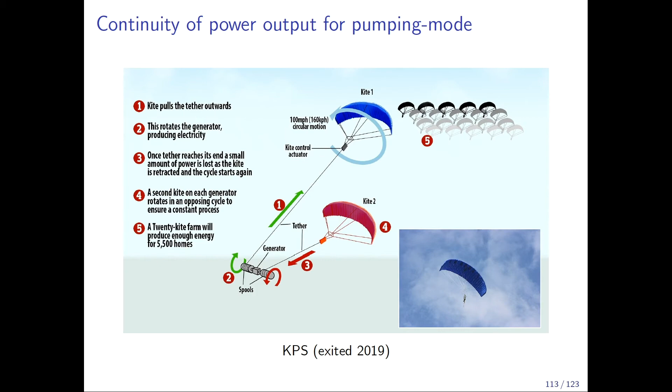The pumping mode one, as I said, has that cyclic nature. So either you need some energy storage on the ground, and there are some options for that, or you take this idea where they had two kites that were going to kind of fly in tandem with each other, and when one was pulling out, the other would reel in. That was kind of their concept. Just in the last number of months, they've actually exited the space, unfortunately. They were sticking with kites, which has pros and cons. We'll talk about in a sec.

This is Ampyx. So this is their concept for an offshore device. Takeoff and landing is challenging, so they've gone with essentially like an aircraft carrier style, where you catapult it into the wind to launch, and it would get up on station, and then to land is essentially like an aircraft carrier landing. You've got the tether on there, you come down, hit the deck, and stop really quick. Which, simplicity-wise, is good, but you've got to now design like an aircraft carrier rated plane that can take that and actually do that reliably. So that's kind of where they're going.

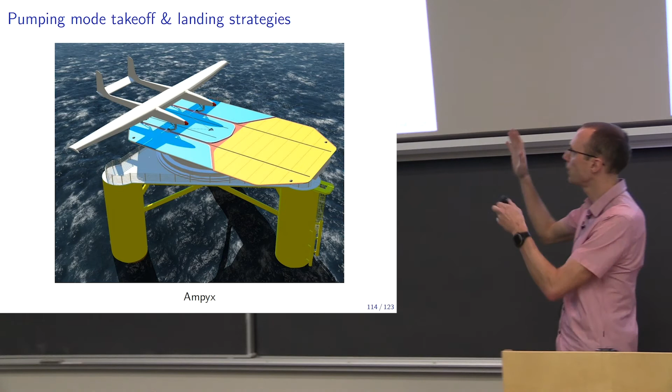They're now kind of, I guess, probably the leading company in the world, burning kind of millions of dollars a month on it. They've got investors and things, but very aggressive time scale. Their investors want to see returns, so they're talking in like a couple of years we might have a megawatt scale machine where they've only flown like tens of kilowatts thus far.

So this is another company out of Germany. It takes a bit different spin on, it's kind of neat. EnerKite, so they've got an arm there. You can see the spool down at the bottom. So they're taking the approach that they want a super lightweight, efficient kite piece, which makes sense when you run the numbers. You want that thing as light as possible so it can move around the sky. Their launching mechanism is essentially to spin this thing in a circle and essentially start flinging the kite out and then have it go up on station. So very exciting. They've had this truck around for like 5 or 10 years now. I'm not sure that it's going to scale that well, but fun to play with.

This is another even more wacky concept, I think, where you actually have one tether, and then it bifurcates, and you have two planes or kites essentially flying in tandem. So you take a hard control problem and like, I don't know, double it, triple it at least. But the reason you would do that is that the other concept is the tether moves through the sky. It has a lot of drag on it. So this part of the tether would only go in and out.

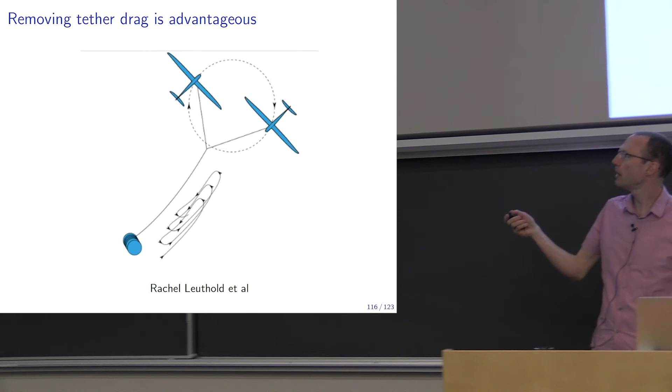So you could potentially get some kind of efficiencies. This is led by a group that does controls research, so it's a beautiful controls research problem. Practically, I'm not sure. These guys were the leaders until literally this week. They basically stopped their efforts, as far as we can tell.

So this was Makani. They were one of the early into the game in the late 2000s, started by some kite surfers. They formed this thing called Makani, which then got bought out by Google X and then spun out as part of an Alphabet company, and then Shell put a bunch of money in a couple of years ago. This is where they got to. They progressed through some flights on shore in Hawaii over the last couple of years, and then last spring, I believe, with Shell's help, they did two test flights of this offshore thing.

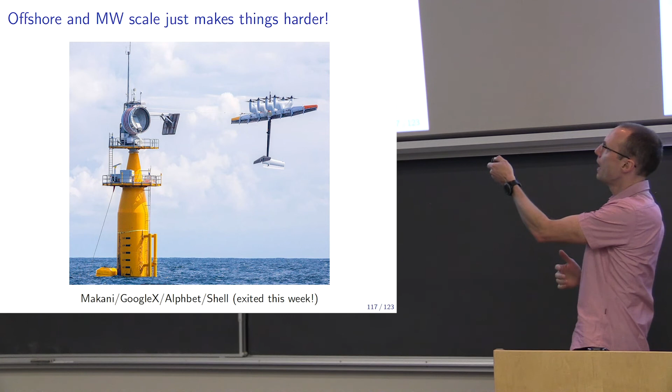So this is a 600 kilowatt rated device. It's basically a wing with a bunch of rotors. They went this way so that you can get good control theoretically. You can kind of move this around, and it has this kind of docking station on here. And then these turn into generators as it flies around. They had one successful test flight, and then on the way back in from the second one, it crashed, went in the ocean. And I think this is kind of where the industry is at, with the exiting of what was the forerunner company.

Will you ever be able to scale airborne wind to the now 10 plus megawatt where conventional wind already is today? I think that's really the hurdle that airborne wind is going to be facing. It's got lots of promise. It's really exciting to work on this stuff, but we'll see what happens with that market.

This is a spin out of Delft University. They've stuck with a soft kite design. If you've ever kite surfed, normally kite surfing kites are up to maybe 10 or 12 square meters. This is 100 square meters, so you can see the person over here. Huge. Again, it's unclear how this concept scales. I think some of these things could be possible at smaller scale. We can make them work, but how big it can be, and hence what the real large scale impact of these is, remains to be seen.

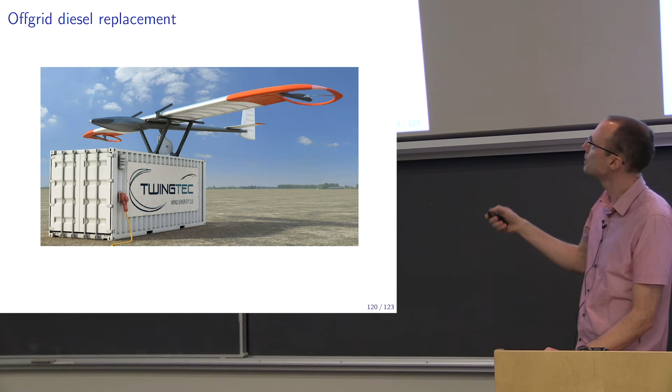So there is some look at other markets. With Brad, we do Prime, which is around off-grid communities and potentially mining operations, things like that. So TwingTec is a Swiss company, and this is their concept. It's got some rotors in the wings, and there's another one up here to do the vertical takeoff and landing, but then it does pumping mode. The idea is this would all fit in a container. You could take it to a mining site, plunk it down, and it would start displacing some of your diesel usage. This again is at maybe the 10 to 50 kilowatt scale. You could have multiple of them. I think that's possible.

And then the other one is potentially a return to some of that direct driving of shipping. So this is a company called SkySails. They've got an arm that does this boat piece. They also have an arm doing the airborne wind energy piece. Potentially you can use this to drive and offset some of the diesel use on boats. Marine transport is a large and growing emissions source, and they're actively looking for alternatives. So SkySails had some success there. It's still kind of challenging. They have this really expensive but neat system, where literally you press a button and it handles the takeoff and landing. You do have to route a bit with where the wind's going, obviously.

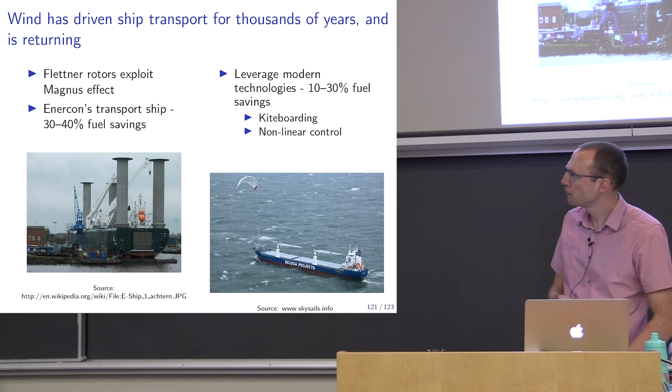And then the other one I wanted to show you is Enercon, the German wind turbine company. When they ship their blades around the world, this is their boat, and they've put these cylinders on board. These are what we call Flettner rotors. It turns out if you spin those, you can generate some lift, just like a sailboat sail would. So they can actually offset a bit of their diesel use. So it's another kind of re-emergence of wind power. There are some other efforts around larger scale sails on boats as well that may see wind energy re-emerge in that space. So there we go.

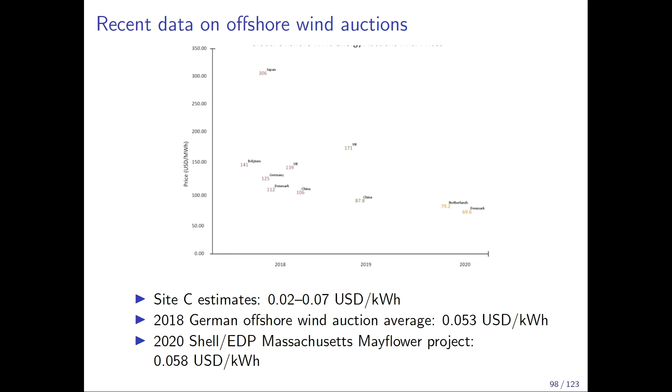No, so those ones that I was putting up there are auction prices. So let me just go back here. There we go. So particularly these ones, when you develop wind energy, you have to have a market to sell your power into, and everywhere in the world does it differently about who pays for what. But a lot of them are moving towards you put in a bid saying, I will sell you energy at a particular price, and you basically accept that bid or not. So these prices are what the wind farm owner will get paid per unit of energy delivered.

So if your turbine breaks, you don't make any money, but that is the price paid to the developer for their energy. Yeah, so it should be real. It is real.

You mentioned about the birds stopping one of the wind farms. How real is it? Because as we know, Trump likes to talk about windmills and birds. So is this real? Yeah, he likes to talk a lot. Yeah, it's real, and there were some bad experiences.

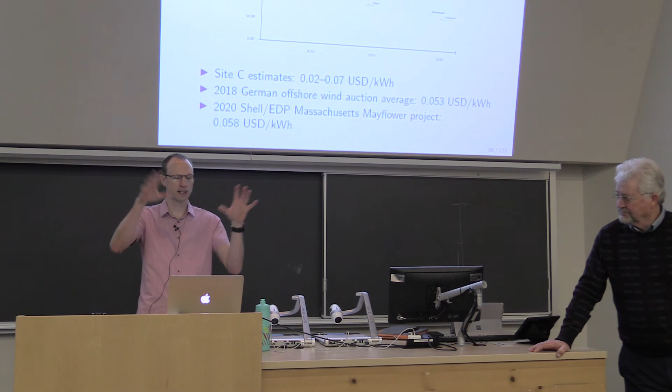And so the main ones have been some of that stuff around preventing nesting locally, things like that. There's some migratory bird things. You have to look over the whole year at what species are coming through. There was some stuff in Alberta with bats. The physiology of a bat is that their lungs are pretty fragile, so if they flew through the wake of a turbine with that bit lower pressure I was talking about, it was actually enough to burst their lungs.

So that one has been remedied by basically operating the turbines at certain times of the day when the bats aren't around, things like that. So again, there's been bad experiences there, but I think much more recognition now of handling that and not placing things where they're problematic.

Yes, sir. Did you want to talk about storage for wind? Because the grid may need it now, or not need it. Maybe speak to Hornsdale in Australia. Yeah, so Andrew Rowe's going to do a talk around energy storage in a couple of weeks, but for individual turbines in remote grid communities, you need battery storage. You need a battery with your diesel generator to make that work.

With a lot of wind power to date, it's really relied on the overall operation of a larger electricity grid to make it go. So Denmark has exceptionally high wind energy. Sometimes it's producing enough wind energy to satisfy all of their demand, and sometimes not. But they can get away with that because there's trading throughout Europe, and it's never the same wind everywhere. So energy trades handle a lot of that, and that's been effective on the levels of penetration we've had to date. In the Alberta case, where you're getting up into 10-20% penetrations, that's where it becomes more challenging.